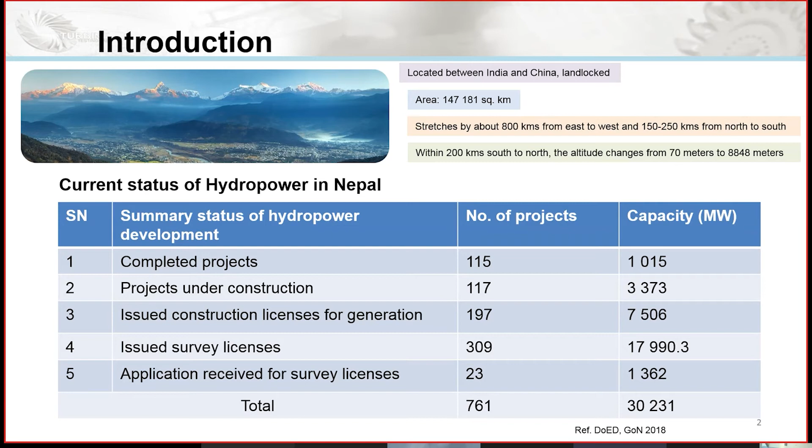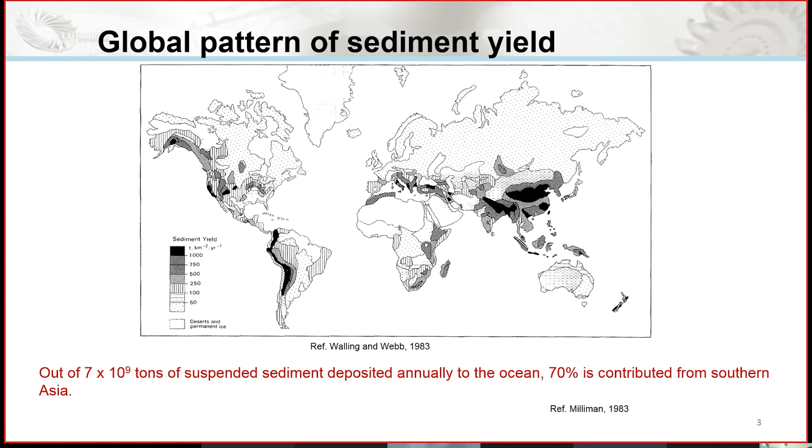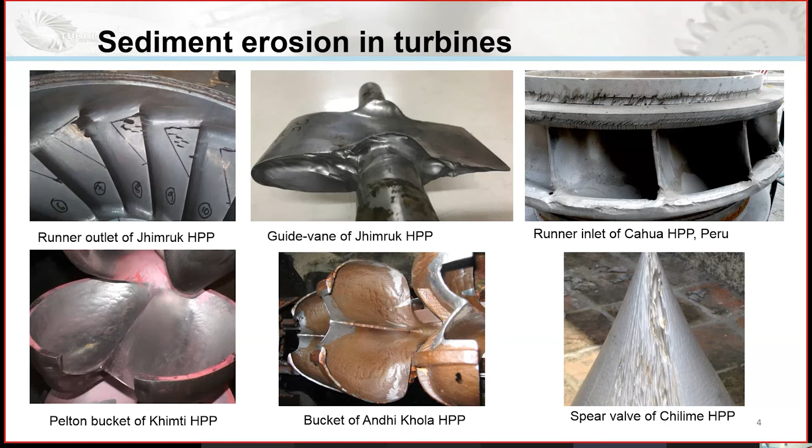So there is no doubt that sedimentation is one of the growing problems. It is one of the happening problems in the context of Himalayan rivers and the power plants in the Himalayan basin. As a result, we are continuously facing these problems. Turbines of all types are continuously facing erosive as well as abrasive wear from the sediment particles. That is why some turbines also get turned off at times when the production should have been at maximum, and they need to go to repair and maintenance every year. There is also a reduction in the efficiency of the turbines because of the erosion problems. Mostly the regions around the runner face these problems because they have maximum velocities in those regions.

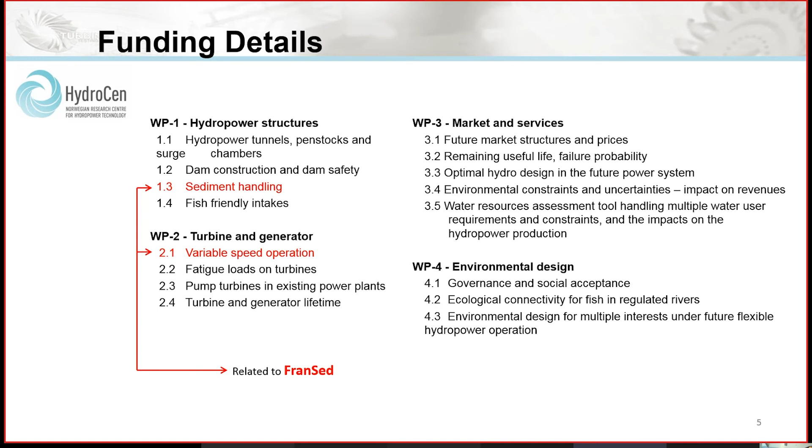Inside the HydroCen project, the FranSed project primarily covers two activities: work package 1.3, sediment handling, and work package 2.1, variable speed operation. In fact, several works have been conducted on turbines with variable speed operation lately at the Waterpower Lab of NTNU. The FranSed project, on the other hand, is focused on variable speed operation, but also on minimizing the effect of sediment erosion. There has been a series of research activities conducted in the past which deal with several aspects of erosion and possible solutions for minimizing it.

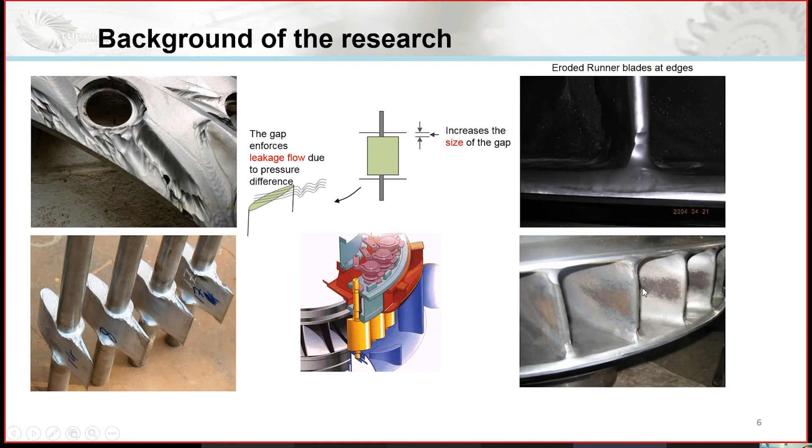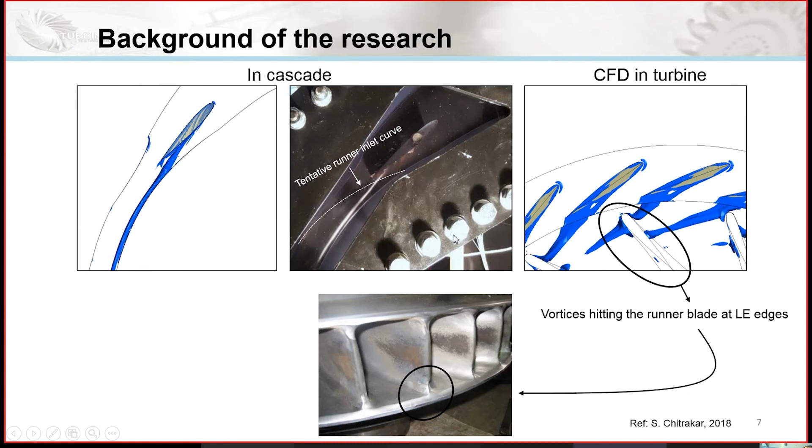A lot of research work was done in this field. The guide vanes, and more precisely, the clearance gap present between the guide vanes and the head covers, was found to be the main cause of the erosion problems in the runner. So in the current project FranSed, we are looking into the possibility of replacing the work of the movable guide vanes with variable speed operation of the turbines. Instead of using the synchronous speed of the generator, the load will actually be controlled by the turbine's speed itself.

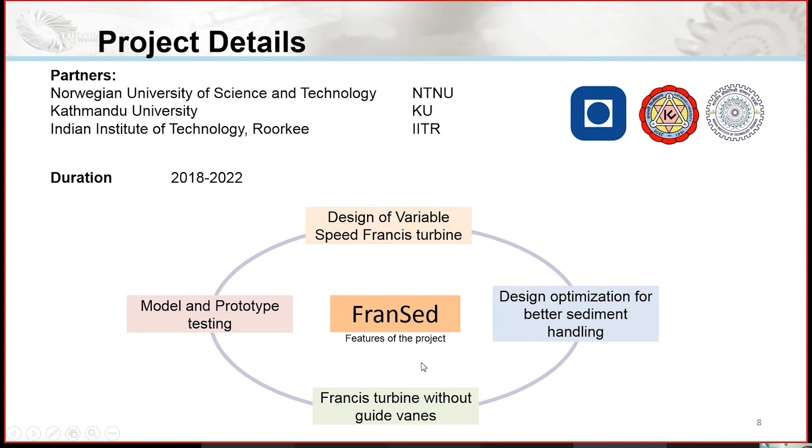Within FranSed, there are 6 work packages, which are led by 3 institutions equally. These are some of the features of the project, which include design of a variable speed turbine, design optimization for better sediment handling, implementing a Francis turbine without guide vanes, and model and prototype testing as well.

Design optimization of Francis turbines for variable speed operation and better sediment handling is one of the major objectives of the FranSed project. So in this regard, we have planned to perform both numerical as well as experimental investigations. And the numerical works are now more or less completed.

It will be taking place in 3 headings. First, we validate the blade design, then we validate the erosion model that we used in the numerical study, and finally we validate the turbines in the turbine testing laboratory of Kathmandu University. So that will be used to test the efficiencies at different operating conditions.

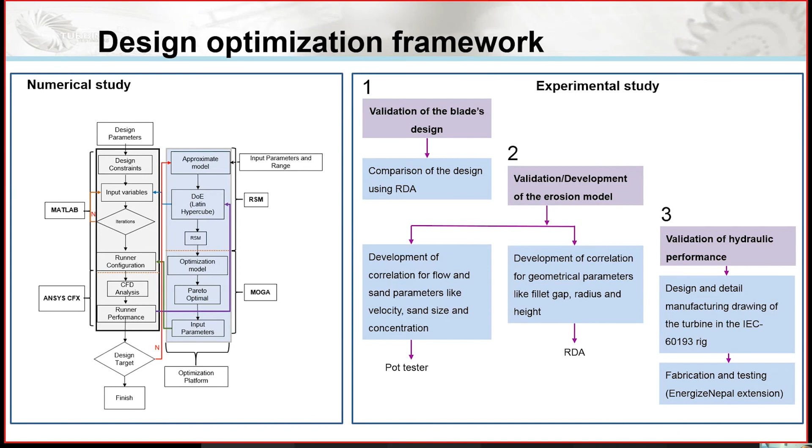This is the final result of the design optimization, which was carried out numerically. The design of the blade was varied and 3 parameters were tested. They are lean angle, blade angle distribution, and meridional profile of the blades. And after performing this optimization, the final design of the runner blade was proposed, which has an improvement in the efficiency by around 2%, but improvement in the erosion by around 26%.

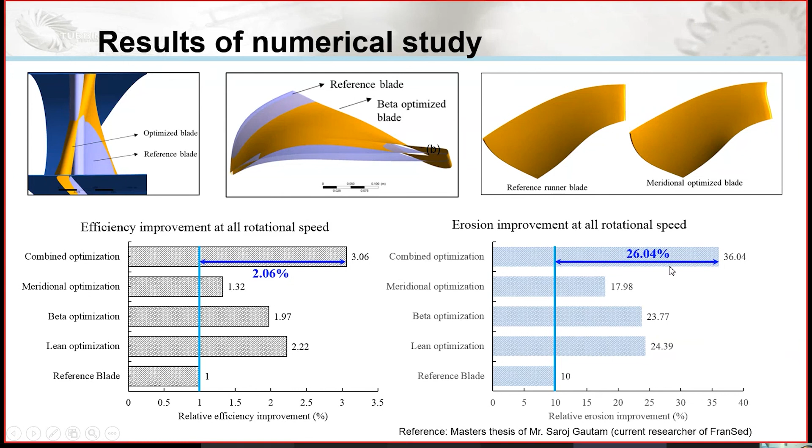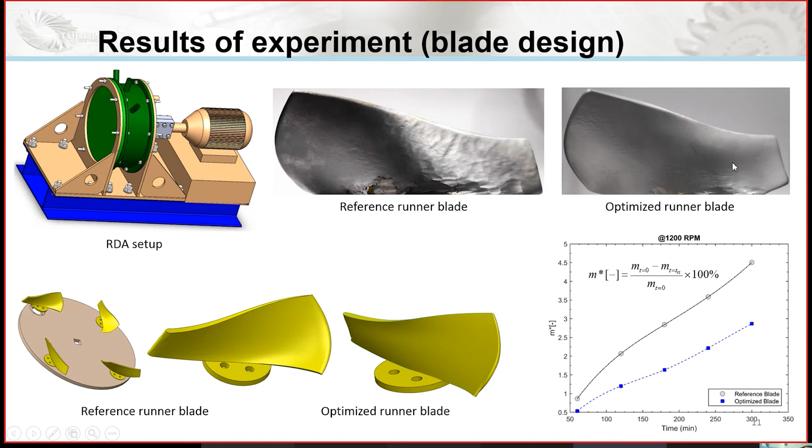And after CFD, we have now started to conduct experimental validation as well. So currently we are using this rotating disc apparatus, RDA, in which the blades are rotated in a chamber containing water and sand. So we used this setup in order to compare the 2 designs previously, and it could be clearly seen after the experiment was done that the erosion in the optimized blade was reduced significantly compared to the reference design.

And the second part of the experiment is to use the same experimental setup, RDA, in order to develop an erosion model by developing correlations between various parameters that affect erosion. And here we are using some simple geometries, which have a slot in between the specimen. And in this case, we are looking into only geometrical parameters: slot width, radius of the fillet, and the height difference between the 2 sides.

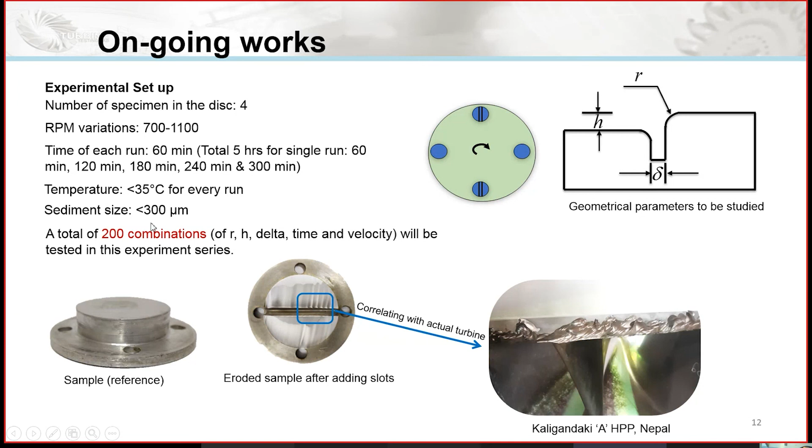So this is actually attempting to picture the small gap that is present between runner and the guide vanes. And by changing the RPM, geometry and time of the erosion, there will be a total of 200 combinations that we will test for developing this erosion model.

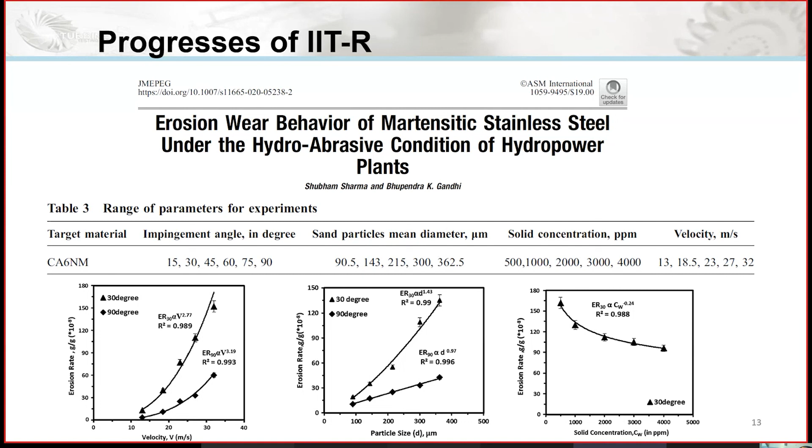Our partner institution, IIT Roorkee, is doing similar experiments, but they are using different setups, and they are also varying flow parameters such as sand size, concentration, and velocity instead of the geometrical parameters that are taken care of by Kathmandu University and NTNU. And they have also published their results. So they have also shown some promising results in these papers.

And by using the flow related data and the geometrical results, we finally expect to develop this kind of erosion model at the end, and the model can be implemented further in some CFD analysis as well.

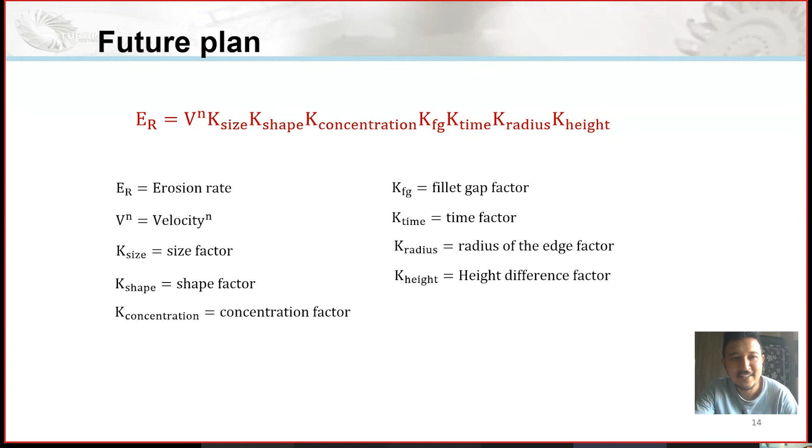Finally, this is one spin-off activity which is showing the turbine designed by our team, and that contains no guide vanes, and it will be installed in one of the power plants of Nepal. And currently it is at the turbine testing lab for the testing.